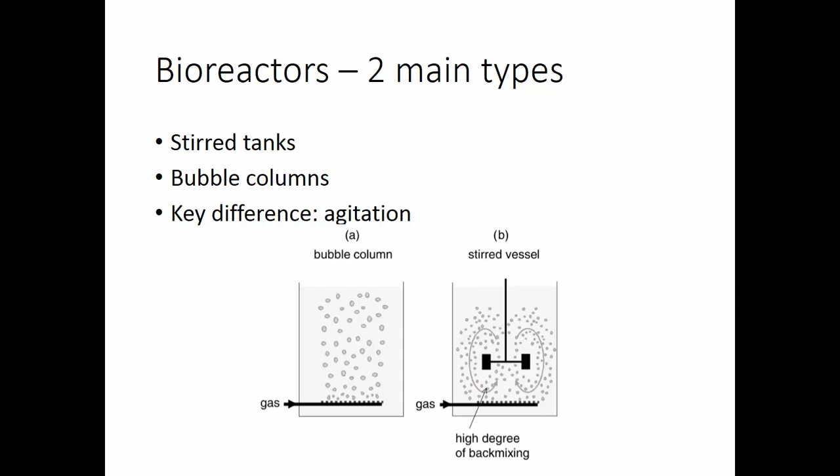The key difference between these two things is how agitation is performed, and agitation begets mixing, as you can imagine. In stirred tanks, we have an impeller attached to a shaft, and some shaft work is done to assure good agitation and good mixing. Whereas in bubble columns, it is simply the force of gas or air being sparged through the liquid that gives us the agitation and mixing we hopefully will need.

So in order for mixing to occur, shaft work must be done. The stirrers rotate around the axis of the tank, and you can see the position of the stirrers in this schematic of a stirred tank.

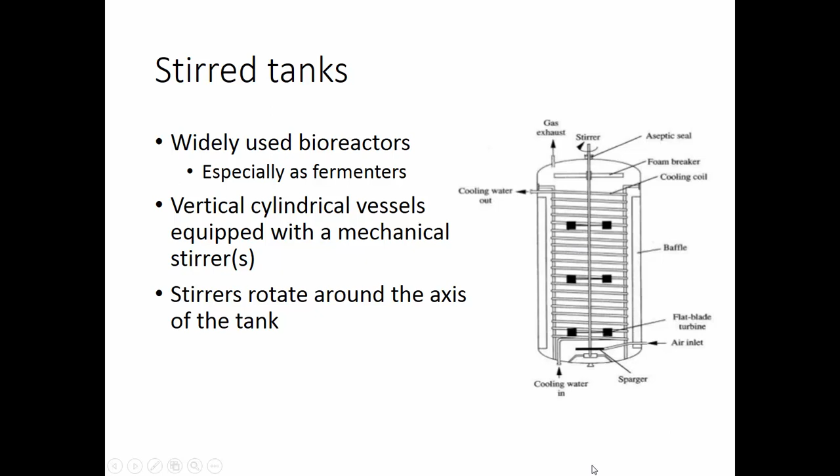So what is the objective? The objectives of a stirred tank in terms of liquid mixing is to make the liquid concentration, which will contain some cells, growth media, and other stuff - it's going to eventually contain product, it's going to contain waste products - as uniform as possible, including dissolved gas like oxygen.

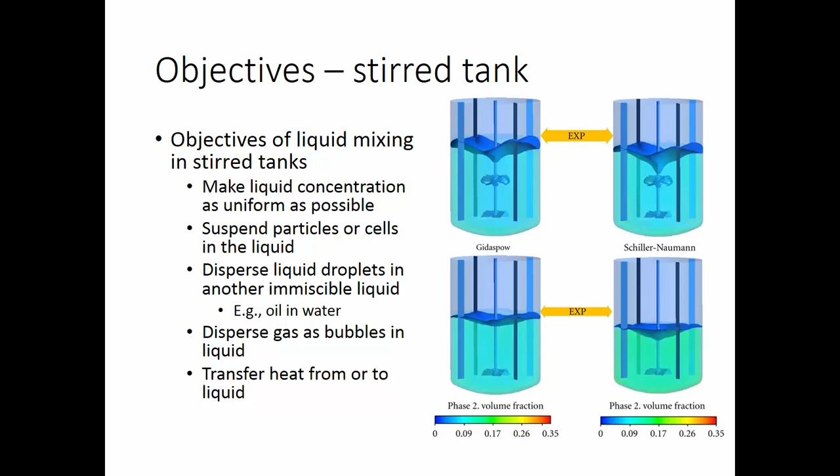We want to suspend particles or cells in the liquid. We would like to potentially disperse liquid droplets in other immiscible liquids. For example, we could be running a fermentation using oil as a carbon source, so dispersing oil in water - stirred tank mixing could help us do that. And we want to disperse gas as bubbles in liquid, as well as potentially transfer heat from or to a liquid. Oftentimes with the heat generated by metabolic activity, we're transferring heat from the liquid to the outside, so as to not overheat the culture.

Alright, so to do mixing, we need mixers, otherwise known as impellers. Some of them you may see cartoons of - they look kind of like propellers on a plane or a boat. Very few are actually like that. We'll see later what they generally look like, what the most common accepted variety of impellers look like.

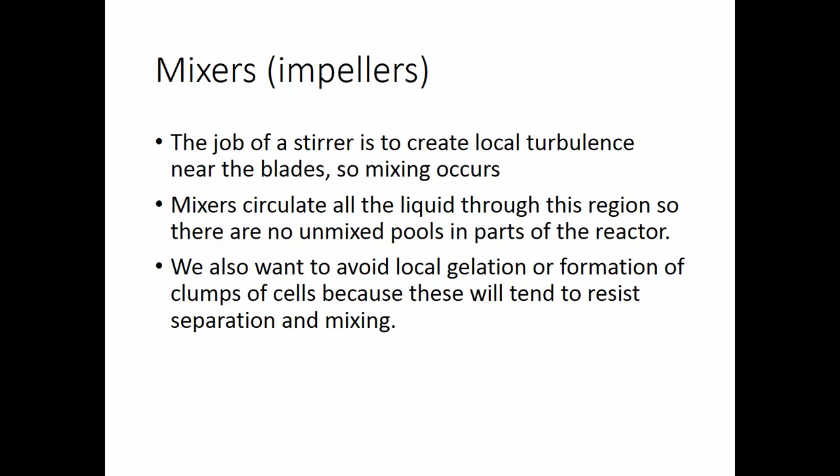Their job is to create local turbulence near the blades, which allows mixing to occur. Mixers will circulate all the liquid through this region, so there are no unmixed pools in any part of the reactor - we don't want any dead space where things go unmixed. We also want to avoid local gelation, which could happen especially with filamentous yeast or other viscous liquids, or formation of clumps of cells, because these will tend to resist separation and mixing.

There are types of impellers, and the one maybe you might think is most common is this propeller. Propellers are used because they cause less cell damage, so they can be potentially good for things like animal cells. But they are rarely used in bacteria and yeast fermentations. If we're dealing with bacteria and yeast, we will use something like this - this looks like a flat disc, called a 6-flat blade disc turbine. You can see it's got blades sticking out of it. It's also known as a Rushton impeller, and I will refer to it as a Rushton impeller going forward.

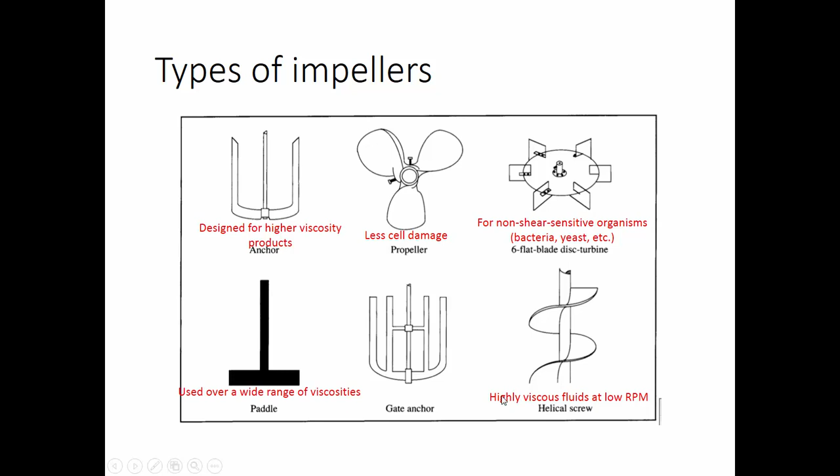There are things like anchors, gate anchors - these two - which are designed for higher viscosity products. The paddle is used over a wide range of viscosities. And things like the helical screw that are less common, used for very highly viscous fluids when operating at a low RPM.

typically 1/3. The diameter of the tank is often equal to the total liquid depth, HL, so D equals HL in most cases.

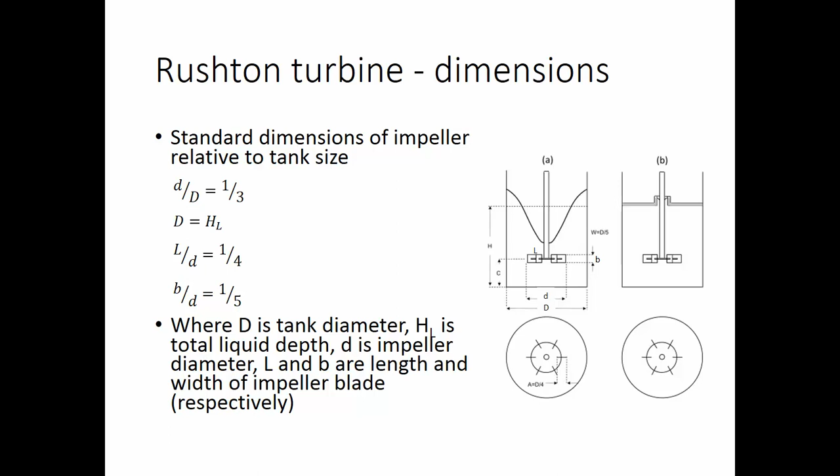The shape and size of the impeller prevents circular flow of fluid, so it prevents a little vortex or whirlpool from forming in the center of the tank where the mixing is happening. This prevents the formation of such a vortex, which leads to bad mixing and bad oxygen dispersion. You can see some regular mixing patterns that develop when the turbine is

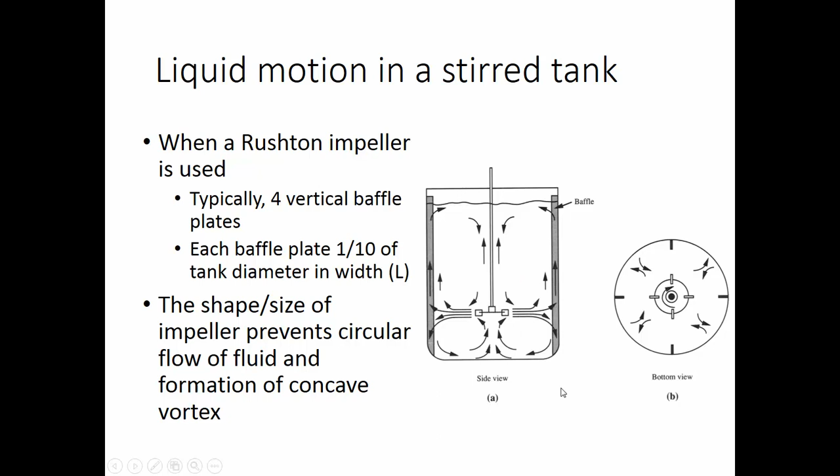moving, when the impeller blades are moving in a baffled tank, where you get some mixing down below the impeller and some mixing above in separate packets, which is good for dispersion of everything in the fluid.

Liquid is sucked into the impeller center from below and above, and you can kind of see that here with the direction of the arrows, where the liquid gets sucked in and then flung to the sides. It's driven radially towards the tank wall, as you can see with these arrows in this drawing. At the tank wall, liquid is then deflected upwards and downwards, which again you can see right here.

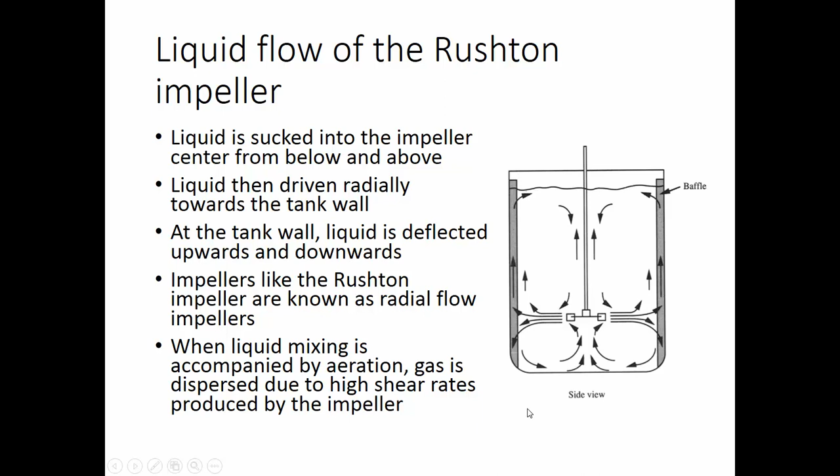Impellers like our Rushton impeller are known as radial flow impellers, and you can perhaps see why, considering how they do their business. When liquid mixing is accompanied by aeration, which it often is, the gas is dispersed due to the high shear rates produced by this impeller. Incidentally, this is why impellers like this aren't good for mammalian cells necessarily, because they can produce these high shear rates which will destroy cells that do not have cell walls.

So we've talked about shaft work, stirring, and mixing. That means power requirements - what are the power requirements of stirred tanks? Essentially, the power required to operate a stirred tank fermenter is found mostly in the mechanical power required to rotate that stirrer. The power requirement will increase the bigger the tank and the more the rotating speed. Power will also vary according to the properties of liquid - if we're using a more viscous liquid, we're going to need more power to rotate that stirrer.

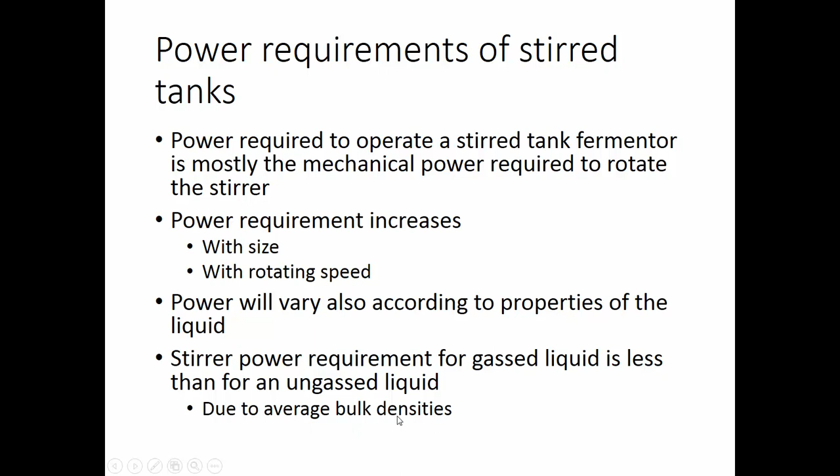Stirrer power requirements for gassed liquids are generally less than for ungassed liquids, and this is due to the average bulk densities of the fluid. Fluid with gas dissolved in it has a different bulk density than that which has no or not much gas dissolved in it.

You can think of this in terms of power ratio, and in your homework you will be asked to calculate a power ratio. This is the ratio of power requirement for a gas-sparged liquid in a stirred tank, PG, compared to that of an ungassed liquid, PO. It is this complicated equation here, where D is our tank diameter, little d is our impeller diameter, N is the rotational speed of our impeller, Q is our gas sparging rate or gas flow rate, nu is the kinematic viscosity, and G is that gravitational constant you all remember from physics.

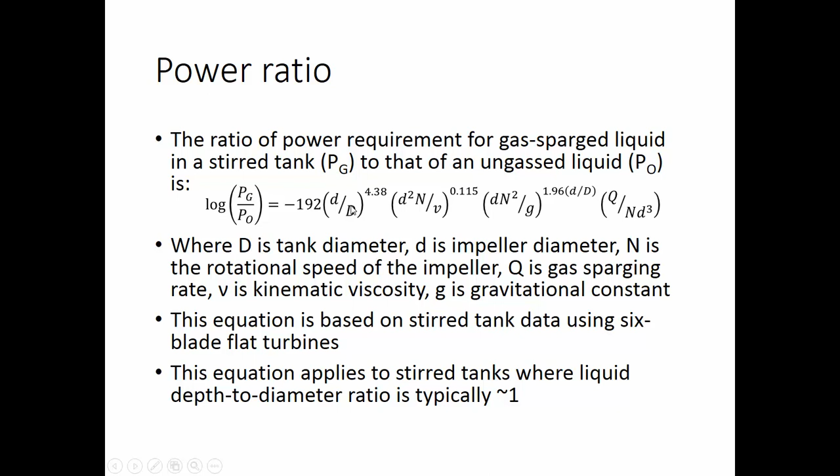This equation is based on stirred tank data taken using 6-blade flat turbines, so typically this will fit in tanks that have these types of turbines in them. The equation applies to stirred tanks where liquid depth to diameter ratio is typically around 1, and you find that is typically what is going on - your big D here is going to be equal to your HL, or liquid depth.

What this equation actually is, is a bunch of dimensionless numbers. It's dimensionless because PG to PO is a ratio, but these are a bunch of dimensionless numbers together here - here's our ratio, a dimensionless group. The equation is made up of the Reynolds number, which is this term right here, the Froude number, or FR, which is this number, and the aeration number, or NA, right here, which is a diameter to diameter ratio, so it is also dimensionless.

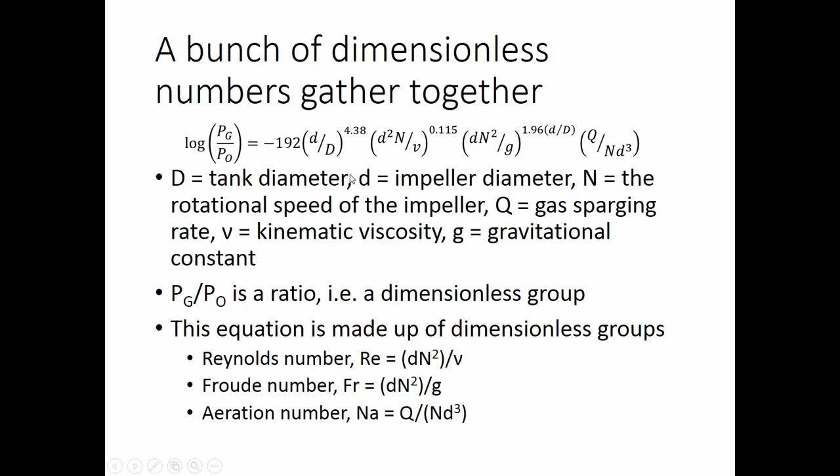Now what do we want? We want KLA, doesn't matter what tank it's in. KLA is important, especially when we're talking about distributing oxygen in the tank. And when dealing with KLA in gas-sparged stirred tanks, it's actually more rational to separate the two.

You know, to take them at their individual KL and A, as both end up being affected by different factors. A can be measured by light scattering or by the chemical method, which we talked about on Tuesday, whereas KL we can find a different way.

The average bubble size, or DVS, can be estimated using this equation here. Here's our A from the KLA, and we have epsilon, which is the gas holdup, if you remember, and here's our average bubble size.

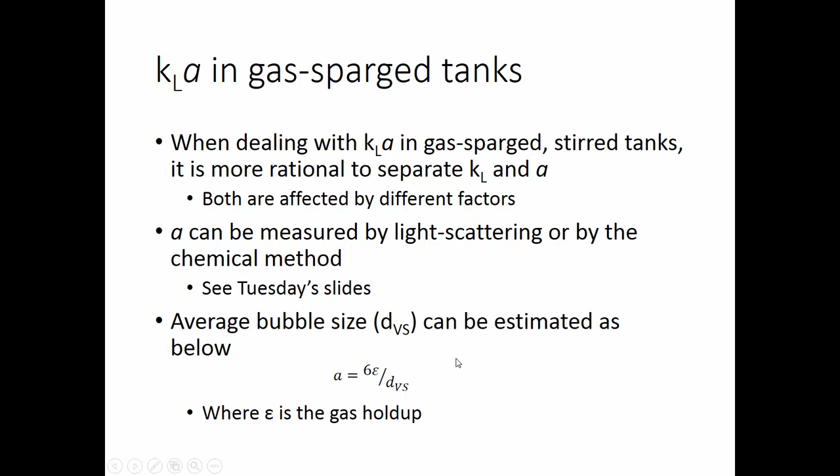So what if we really want KLA, and we're not just doing this in a tank full of water? Well, it's more practical if KLA in gas-sparged stirred tanks were directly correlated with actual operating variables and liquid properties, as opposed to just running water in a stirred tank all the time. So the below equations can be used to produce a very rough estimate of KLA in sparged stirred tanks.

There are two equations here. One is for volumes less than 2.6 meters cubed, and the gas sparge power requirement, the PGV ratio, is between 500 and 10,000 watts per meter cubed. We would use this equation.

And for air electrolyte solutions, again with V less than 4.4 meters cubed this time, we have a PGV again of between 500 and 10,000 watts per meter cubed. We would use this equation right here.

Generally, when we talk about air electrolyte solutions, if we're pumping air into a tank full of growth media, that would constitute an air electrolyte solution, make no mistake. And you see this UG term in both of these equations - that UG is the superficial gas velocity.

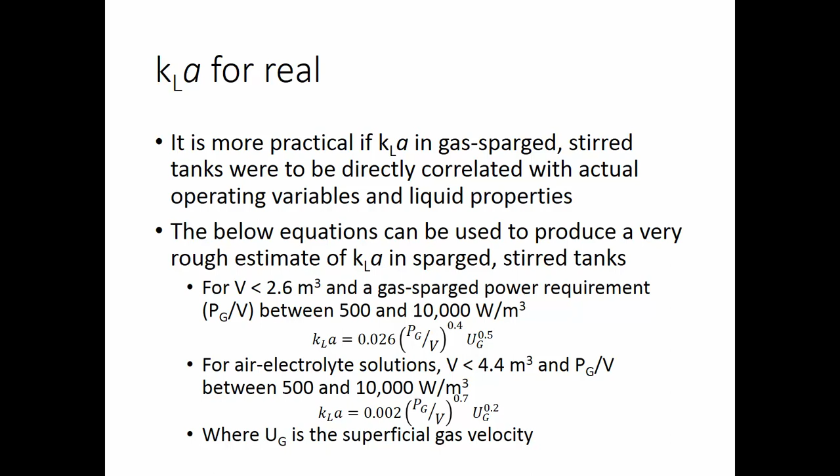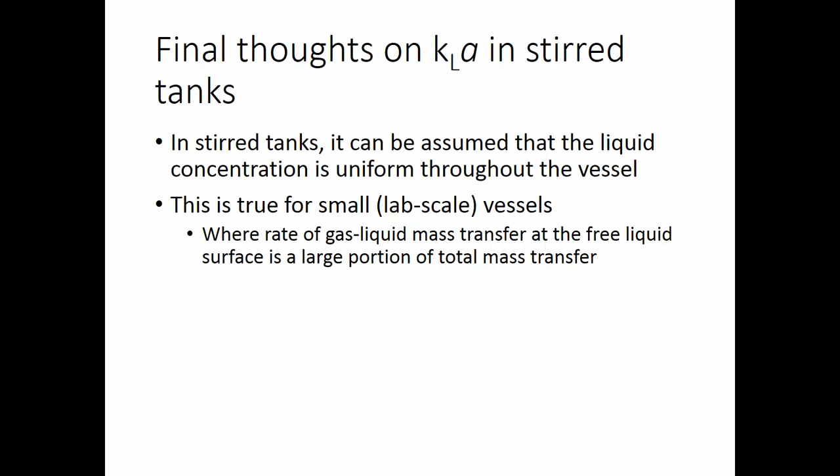In stirred tanks, it can be assumed that the liquid concentration is uniform - we're assuming the stirring has made everything uniform. This is true for small vessels, lab scale vessels, where the rate of gas-liquid mass transfer at the free liquid surface is a large proportion of the total mass transfer, again because of those small volumes.

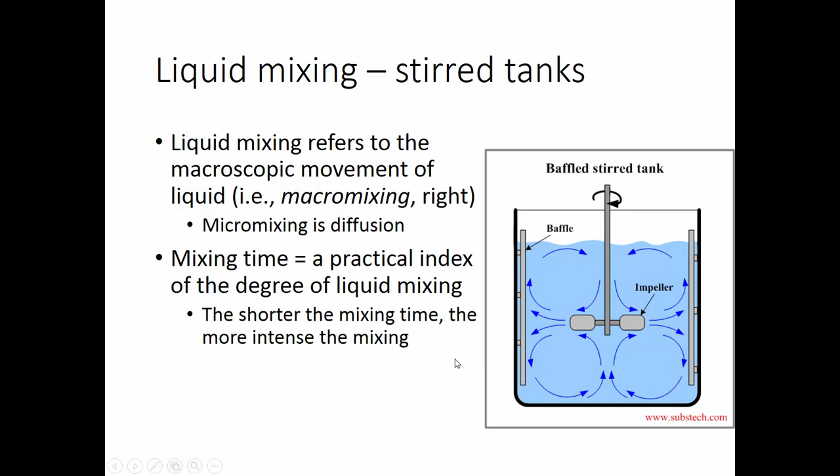Mixing time is a practical index of the degree of liquid mixing. The shorter the mixing time, the more intense the mixing. And we can determine mixing time.

If we have a stirred tank full of water, we inject a little dye into the tank at one area, and then we see how long it takes before the pulse of color comes back to the same place. As you mix, it's going to take less and less time for the pulse of color to come back, because basically we're mixing.

So how long it takes before this pulse of dye comes back to the same place is known as TC. And mixing time in general, TM, is equal to about 4 TC usually. You can see here the TCs are spaced out, between every apex here.

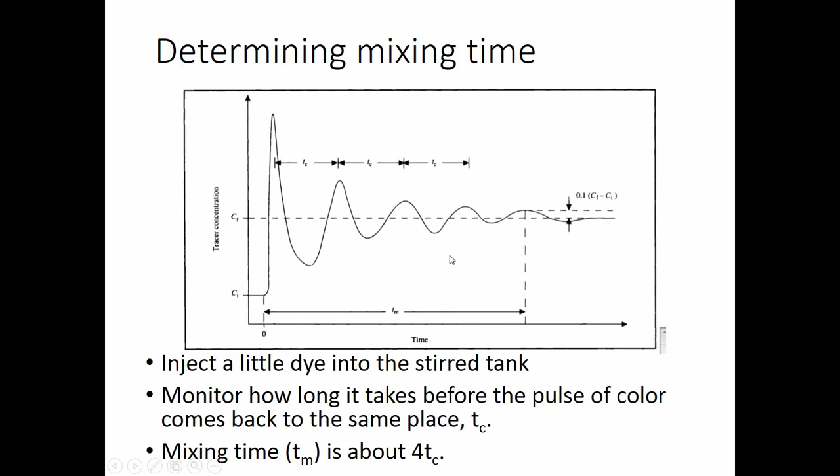Okay, so let's do an example here of mixing time.

We have a stirred tank reactor equipped with a standard Rushton turbine, which contains a liquid with density 1 gram per centimeter cubed, viscosity of 0.013 grams per centimeter second. The tank and liquid depth are both 2.4 meters, that 1-to-1 ratio, and the liquid volume is 10.85 meter cubed. Our impeller diameter is 0.8 meters, and let's estimate the mixing time, our TM, when the rotational stirrer speed, or N, is about 1.5 per second.

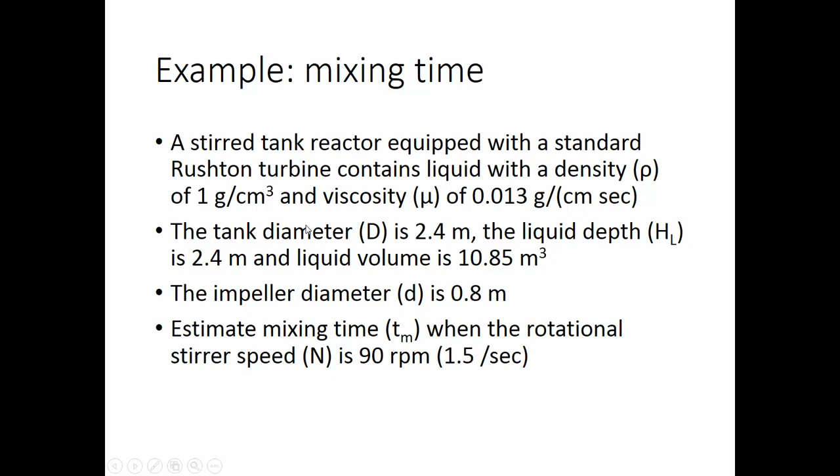First we can determine the Reynolds number, and in a stirred tank you determine the Reynolds number using this equation, where N is our stirrer speed, D is our impeller diameter, rho is our density, and mu is our viscosity. We can easily plug all these things in because we have all those values, and we get 7.38 times 10 to the 5th - that's our Reynolds number, so that's highly turbulent, as you can imagine, and that's the point.

For good mixing, you want turbulence, and that's what you get in a stirred tank.

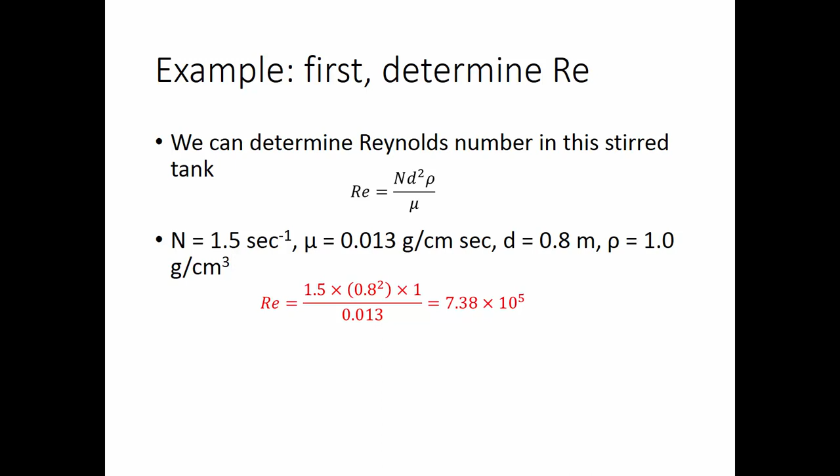Now we want to estimate the power number. How do we do that? Well, we have the Reynolds number right here. We can use this chart below to estimate the power number, our NP, which is equal to P divided by N cubed, D to the 5th, times density.

Here's our Rushton turbine, so we want this trace right here, and we have our Reynolds number. Let's estimate it to be about here, and we bring it over. It's tough because there's a big gap here, but let's say it's about 6. The NP, our power number, is about 6. Let's call it that.

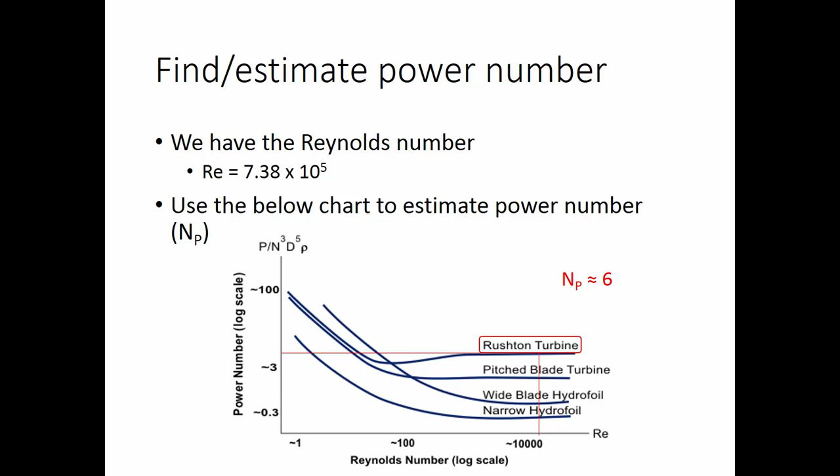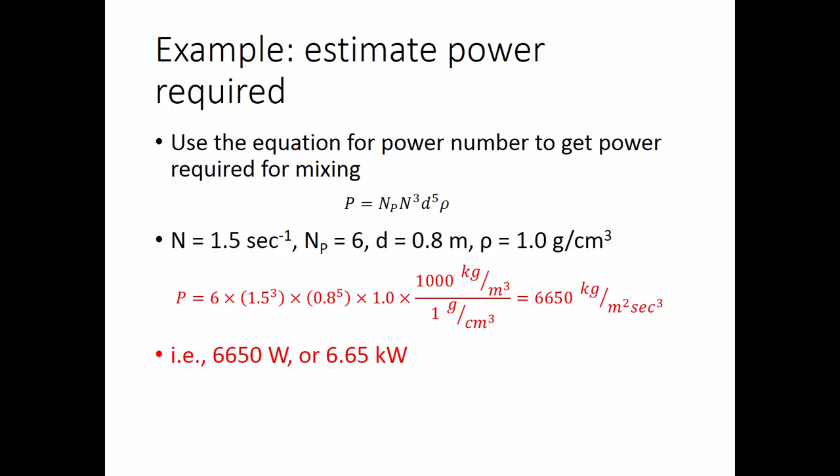So now we have the NP, we can estimate the power required for mixing, which is again P, power required, divided by n cubed d to the fifth, and rho, or density - that is the power number. We just rearrange that equation here to solve for P, and we get 6,650 kilogram per meter squared second cubed, i.e. 6650 watts, or 6.65 kilowatts, which is the power required for mixing.

Finally, we can determine mixing time. So this chart, again, we use our Reynolds number. We can estimate the mixing time times the stirrer speed, our Tm times N. We have a Reynolds number, 7.38 times 10 to the fifth. Wait a minute, okay, this doesn't go far enough. And believe it or not, where I got this from doesn't go that far. The same chart doesn't go that far either.

But you will notice that it kind of levels off here, so we can estimate that - we just extrapolate here. The N times Tm is probably going to be around 30. We estimate that it's going to be around 30. Again, this is an estimate. And so if we do estimate that N times Tm is 30, we can then solve for Tm by dividing by N, and we get 20 seconds. So our mixing time is 20 seconds in this case.

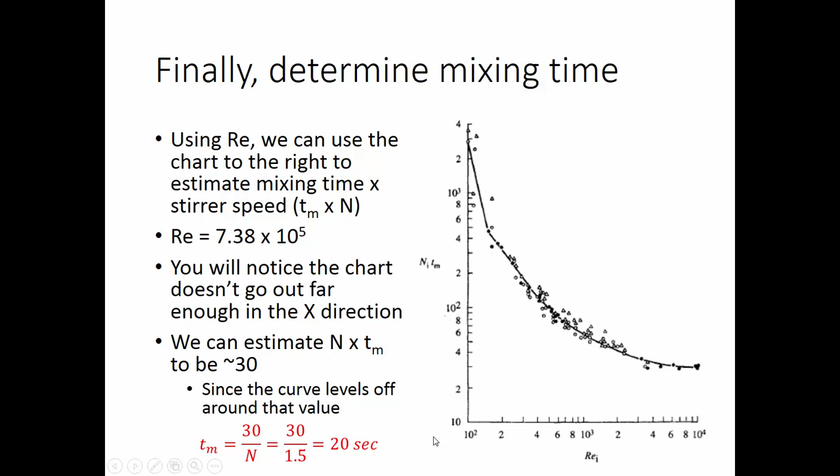Alright, so we've talked about stirred tank reactors. Let's move on to the interesting bubble column reactors or fermenters. There's no mechanical agitation with these. The agitation, aeration, and mixing is achieved by the gas bubbles floating up through the liquid by gas sparging. And sparging is typically done in bubble columns, and in most fermenters, from bottom to top.

Power requirement - well, it's power requirement for gas feed only, so it's a lot less than stirred tanks of comparable capacities, which could be a good thing if you're trying to save money on your electric bill. There are no moving parts - again, you're just blowing air through here. It's an easier scale-up; bubble columns are an easier scale-up.

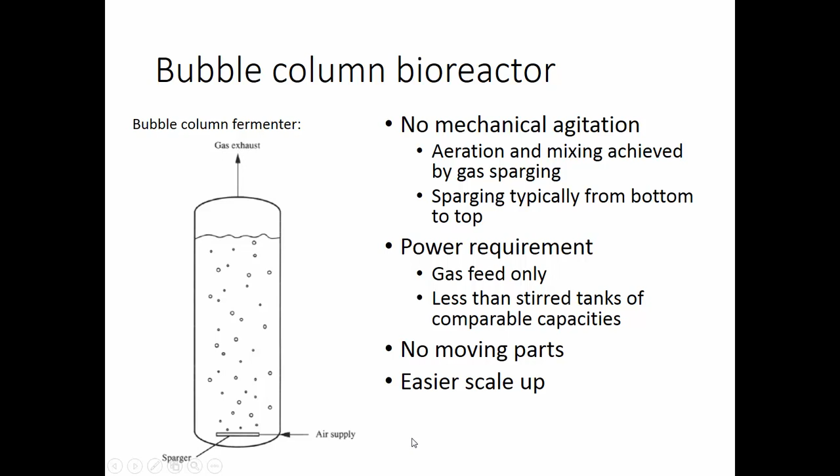There are two types of flow regimes for bubble columns. There's what's called homogeneous flow, which is at gas velocities that are low, between 3 and 5 centimeters a second. You can see a schematic of homogeneous flow right here. It's known as quiet flow - bubbles are evenly distributed along the diameter of the column, and you can see that here.

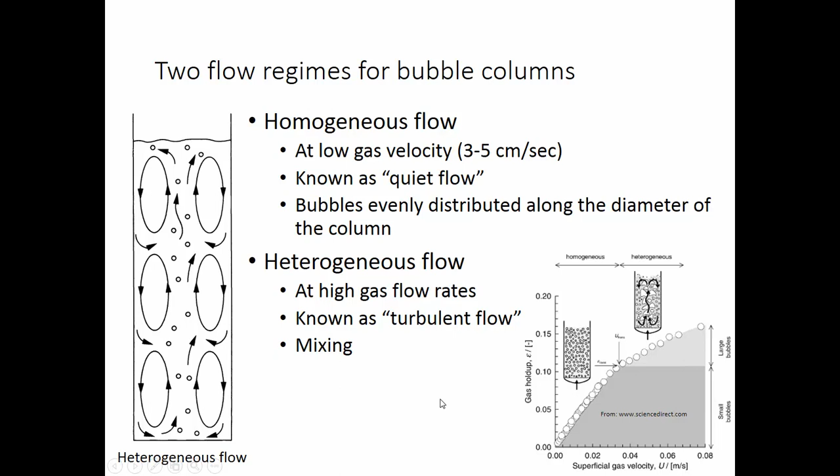But oftentimes we want to be at heterogeneous flow, which is at higher gas flow rates, known as turbulent flow. You can see there we get some flow patterns here - we have heterogeneous flow, with some circular flow patterns in the bubble column fermenter, and that is going to promote mixing. So if we really want to promote mixing, we'd rather be at heterogeneous flow, at those high gas flow rates.

Okay, so the general flow of liquid - you can imagine the spargers down here at the bottom somewhere. The liquid gas mixture, the gas and the liquid, will be propelled upwards in the central region, and you can sort of see that by the way these bubbles or flow patterns are moving. They'll move downward in the annular region, near the column wall, and you can see that by the way these flow patterns are shaped here. The flow pattern is caused by differences in bulk densities of the liquid and gas mixture.

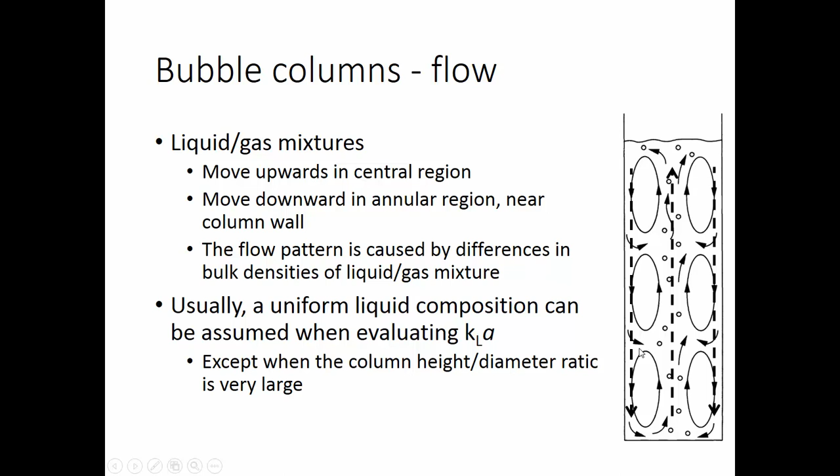Usually a uniform liquid composition can be assumed when we evaluate our KLA, which we'll talk more about in a bit, except when the height diameter ratio is very large. That doesn't happen too often with bubble columns, but sometimes it's necessary when you have a really tall, thinner version of the bubble column.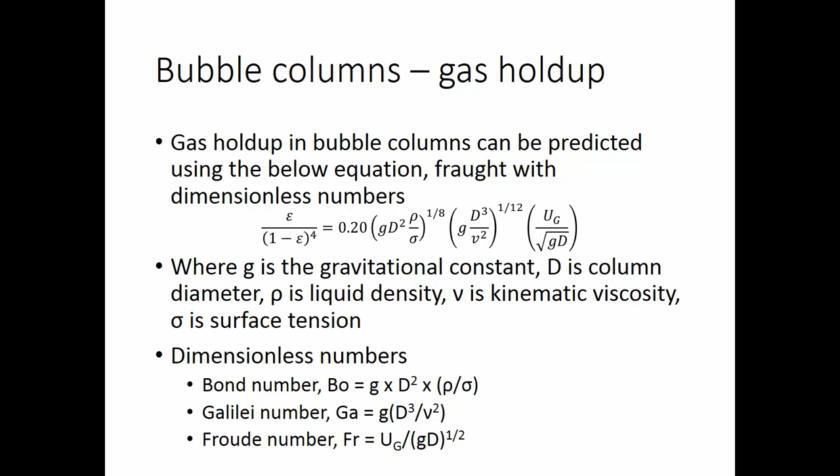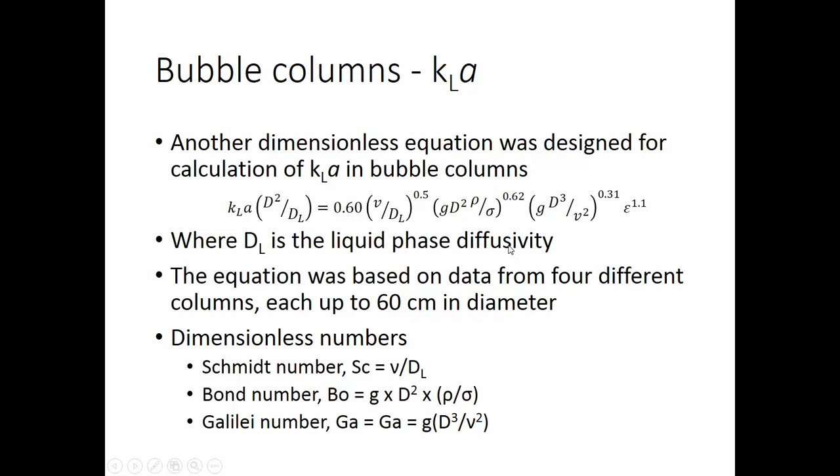Bubble size is another one. Bubble size has been studied in column reactors like this, by the photographic method, a kind of crude method where we take pictures of bubbles and measure their size using some sort of software. The largest fraction of bubbles in reactor study was greater than or equal to 1 millimeter, so most of them are going to be that size. The average bubble size is affected by the Sparger design or the Sparger size, so keep that in mind. But bubble size can also be affected by coalescence and breakup rates, which we'll talk about more.

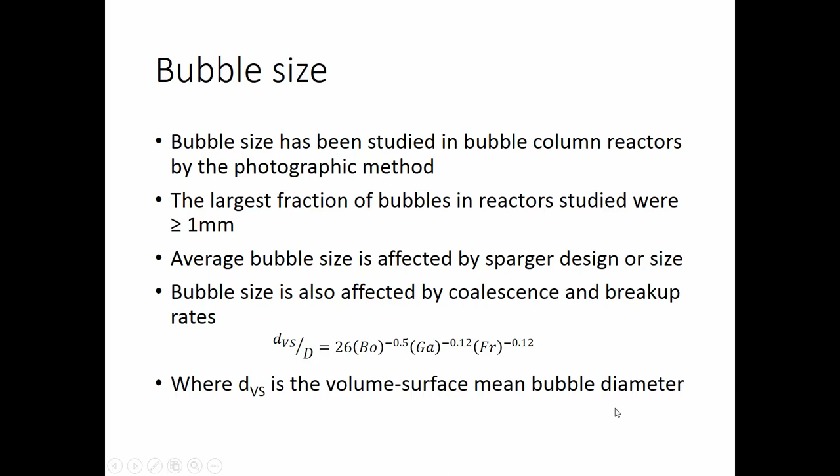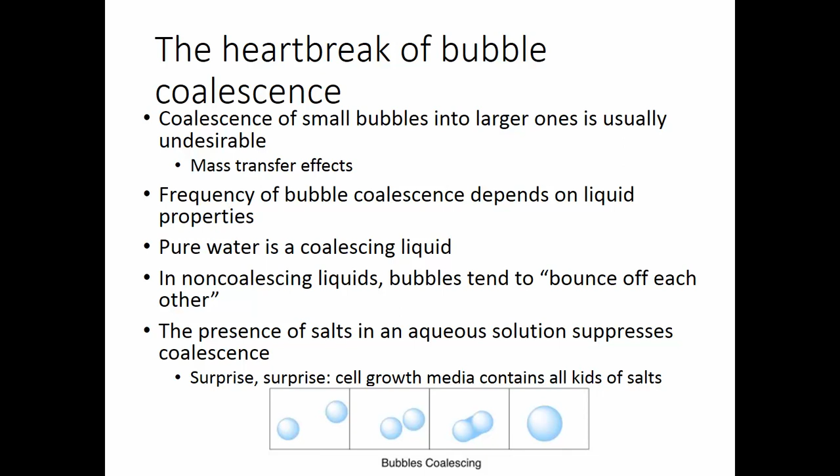To get KL alone, we can use our Sherwood number, which is equal to KL times the average bubble diameter divided by DL, the liquid phase diffusivity. Or we can multiply 1/2 times the Schmidt number to the 1/2, times the bond number to the 3/8, times the Galilei number to the 1/4. So we can get our KL in a number of ways.

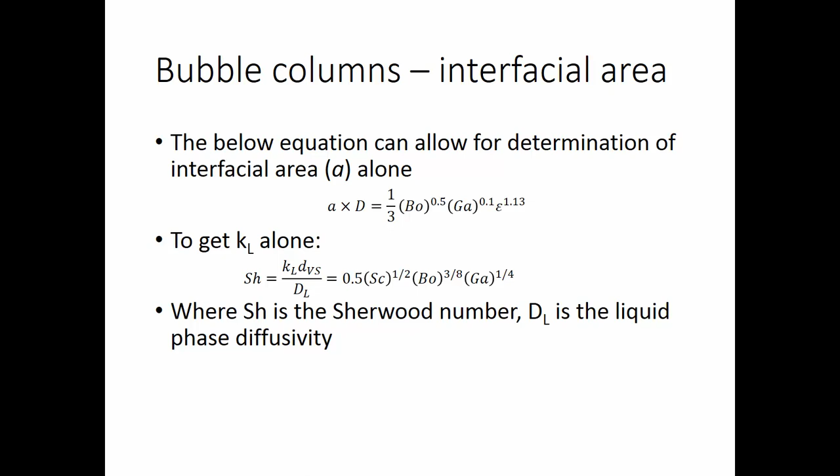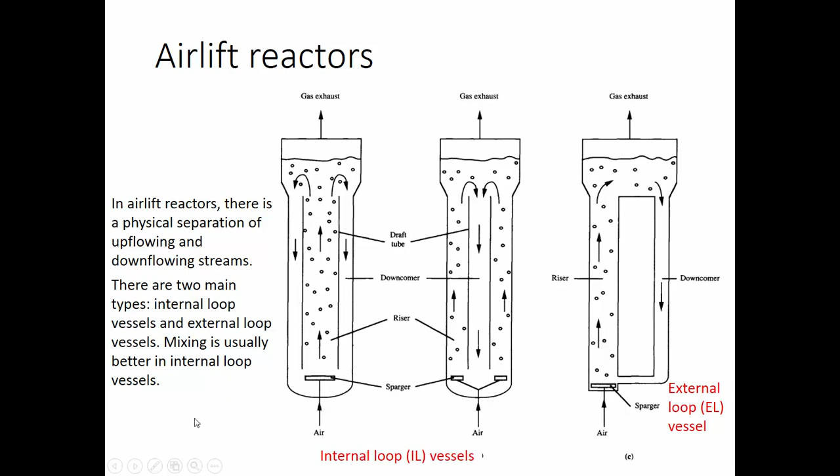There are special kinds of airlift reactors called deep shaft reactors, and these are tall internal loop airlift reactors built underground.

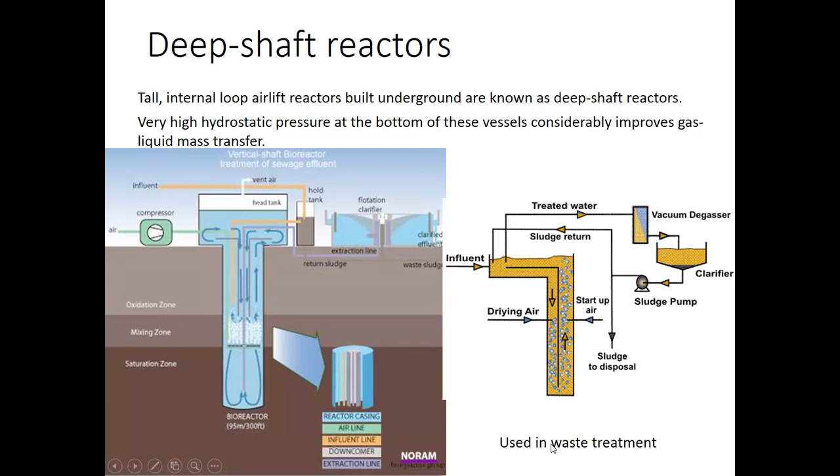These are deep shaft reactors, and they have very high hydrostatic pressure at the bottom of these vessels. This one looks like it goes down about 300 feet, and this considerably improves gas-liquid mass transfer. Oftentimes you can see a schematic with names like sludge, influent, all that stuff. They're often used in waste treatment, these deep shaft reactors.

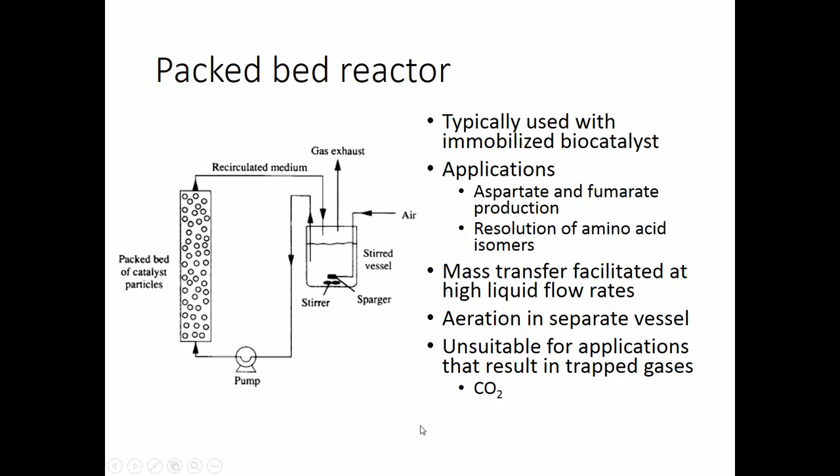The mass transfer is facilitated at high liquid flow rates. Aeration is often done separately, and the liquid is just pumped through by a pump, as opposed to being aerated in the actual column itself. This is unsuitable for applications that result in trapped gases such as CO2. So if there's a lot of CO2 being used or evolved, you don't want to use a packed bed reactor.

An idealized simple case of a reaction with Michaelis-Menten kinetics, we consider mass transfer effects to be negligible. Maybe that's a stretch considering what we talked about on Tuesday. But we have a reaction rate equation where U, our fluid velocity through the bed, times the change in substrate concentration over the change in height of the bed, is equal to this Michaelis-Menten looking equation: negative Vmax times Ca divided by Km plus Ca.

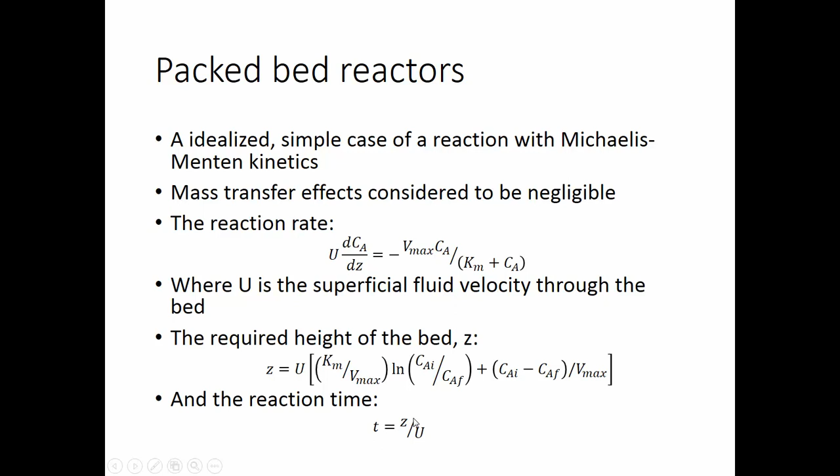The required height of the bed looks like this: Z equals U times Km over Vmax, times the log of the initial concentration of substrate divided by the final concentration of substrate—initial going into the column, final going out of the column—plus CAI minus CAF divided by Vmax. The reaction time in this would be the height, Z, divided by that fluid velocity.

Okay, lastly, I mentioned I would talk about microreactors very briefly. These are miniaturized systems with fluid channels and reservoirs of very small dimensions. The channels can be anywhere from 1 millimeter down to as low as 0.05 millimeters in diameter. Currently, microreactors are generally used for analytical systems, to adjust reaction and fermentation conditions on a small and micro scale, and you can potentially do many of these at once, depending on the setup you have.

It is feasible that microreactors could be used for small-scale production because of the larger specific interfacial areas. We have small fluid layer thicknesses that allow that, small fluid channels, small Reynolds number. Often we're operating basically in laminar flow, not really turbulent flow. They're more compact, and there's no scaling up problems.

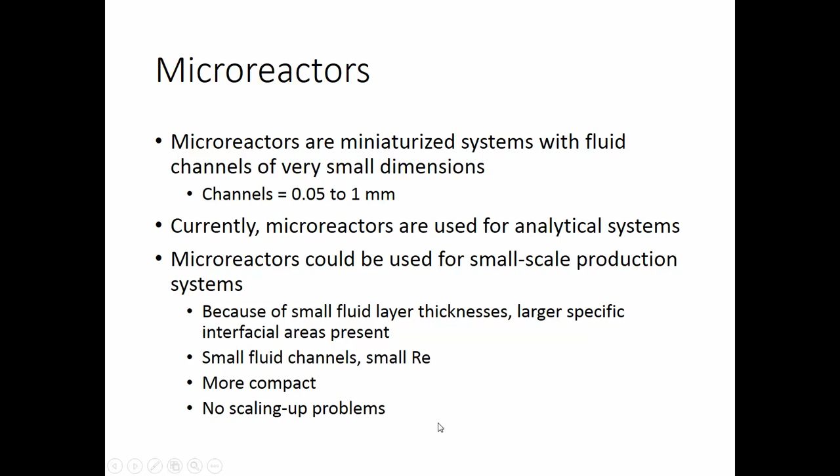There is a company in Woburn, Mass, called Pharyx Incorporated. They produce these little microbioreactors, and you can see the little channels here, with little entry ports at the top. The channels go off to different reservoirs, which are put on a kind of platform that will pump them a bit and allow for some mixing and movement of the fluid. You can see sensors in the different cavities that can tell things like dissolved oxygen concentration, pH, etc., and there are reservoirs for things like acid and base to control the fermentation. You can visit them and look at their website, see some pretty pictures of what they do, at www.pharyx.com. Those are microbioreactors, and they're more and more commonly used these days.

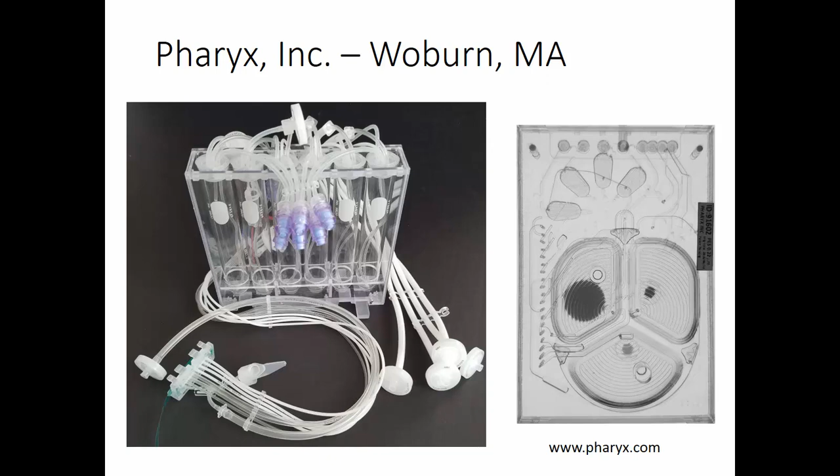Again, currently they're used for analytical purposes, but they're really neat. The physics behind them, the biochemistry, and the mechanical engineering behind them—it's all very neat. So take a look if you're interested.